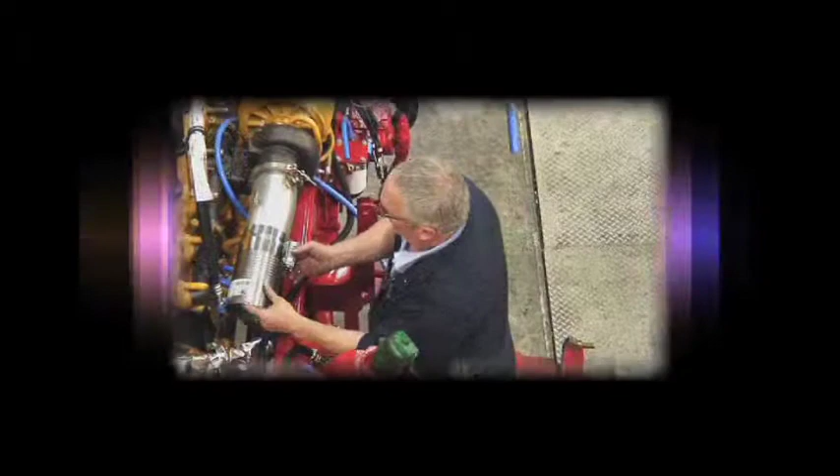We humans make things in a very different way. We carve out raw materials, pour things into molds, or we make a bunch of parts that we put together to make even bigger objects. Think about it: nature grows things like trees, then we break these trees apart to make our own stuff. Nature adds to create, and we subtract.

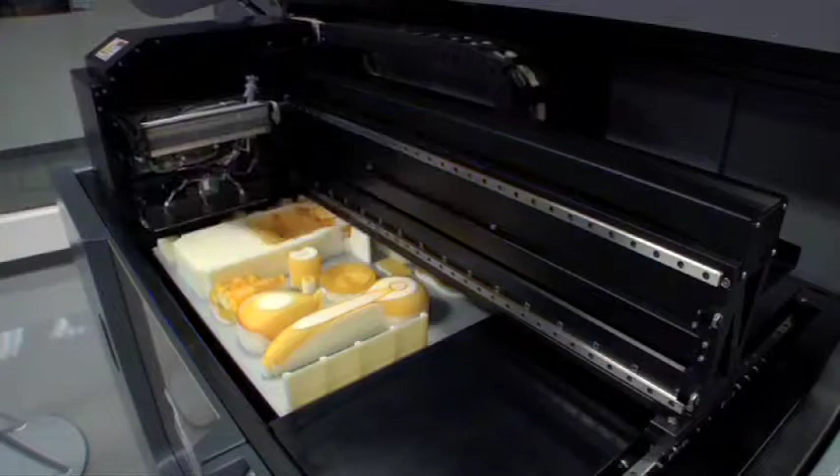What if we could grow things too? What if we could kind of print out our designs into real solid objects? Now that would be cool.

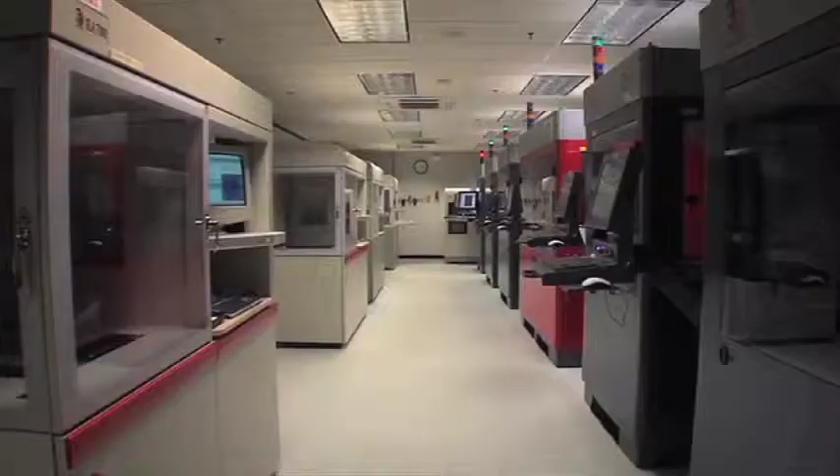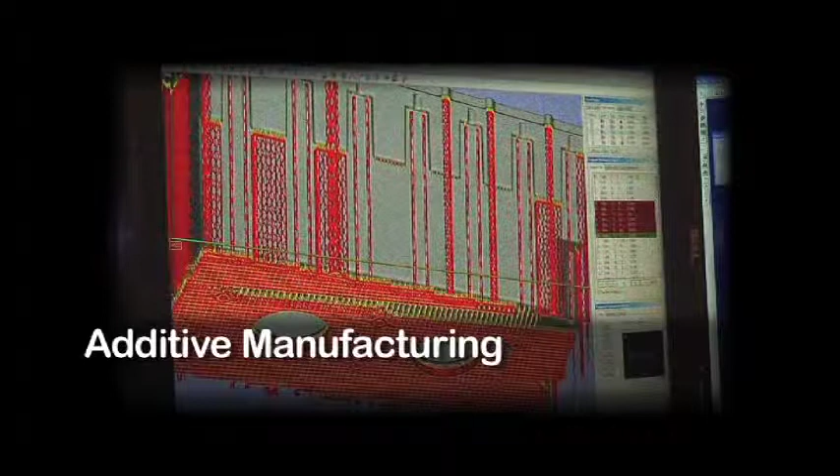Additive manufacturing, put quite simply, is precisely what it says: you're manufacturing something by adding. Actually, in the purest sense of the word, we are growing parts because we're adding layer by layer by layer to create virtually any geometry that you can imagine. The additive manufacturing process is focused on three main areas: 3D computer modeling, 3D printing, and the actual 3D additive manufacturing of products.

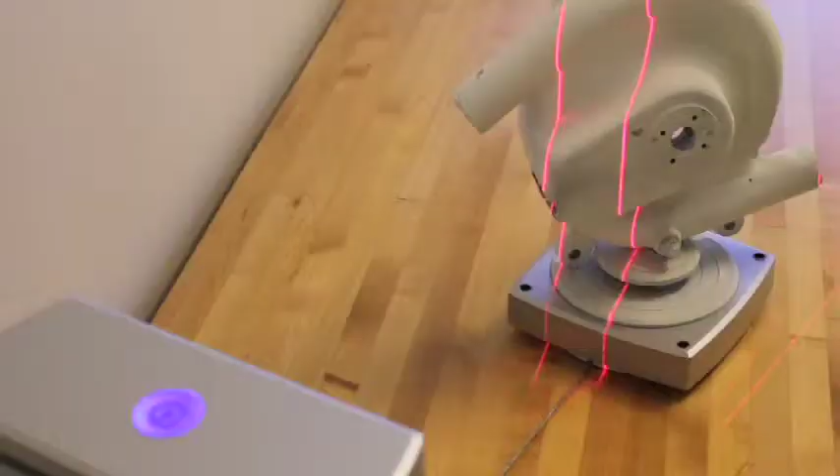One of the coolest ways to create a 3D computer model is with a scanner. These devices scan real objects to make digital copies. From there, you can use the data in lots of ways.

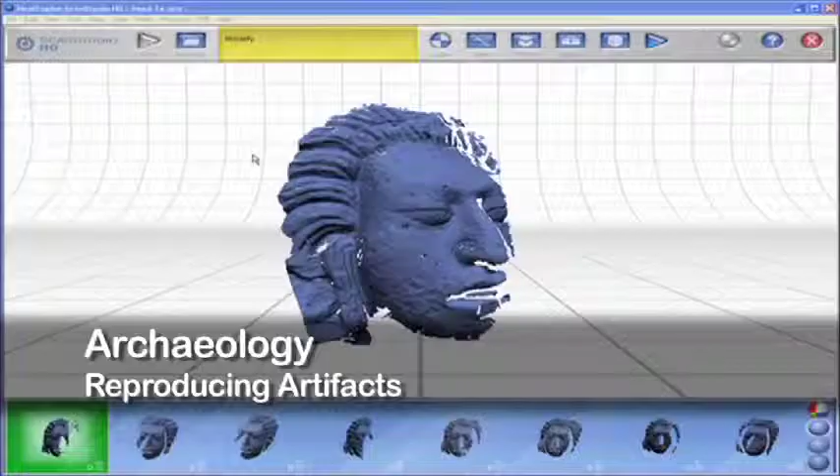Once you have the computer model, you can create a physical model using additive manufacturing.

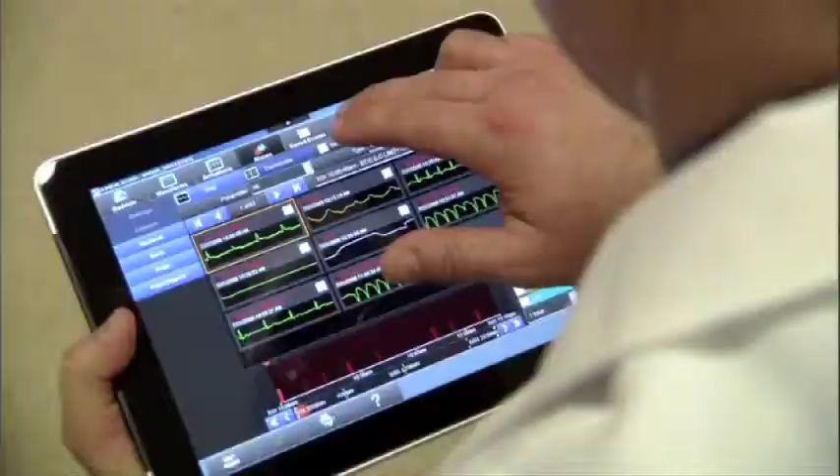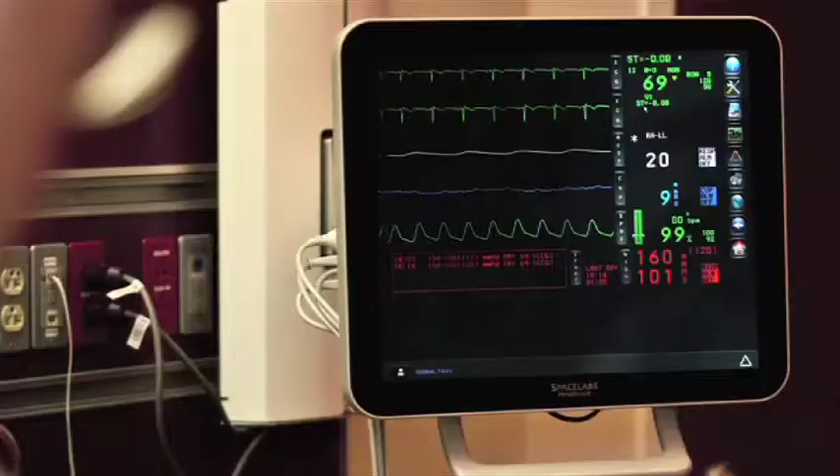Spacelabs uses additive manufacturing to design high-tech medical devices and patient monitoring systems for the healthcare industry. So this is what's been on the shelf for actually quite a while at Spacelabs. We were kind of tasked to make a next generation of that.

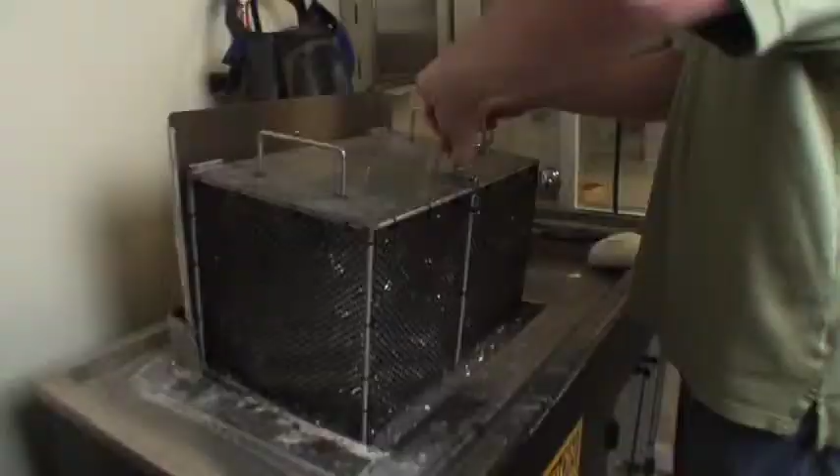Getting a prototype is very expensive and took a long time to get. Now we can print it out overnight and actually feel a real part in our hand. It shrinks our design process.

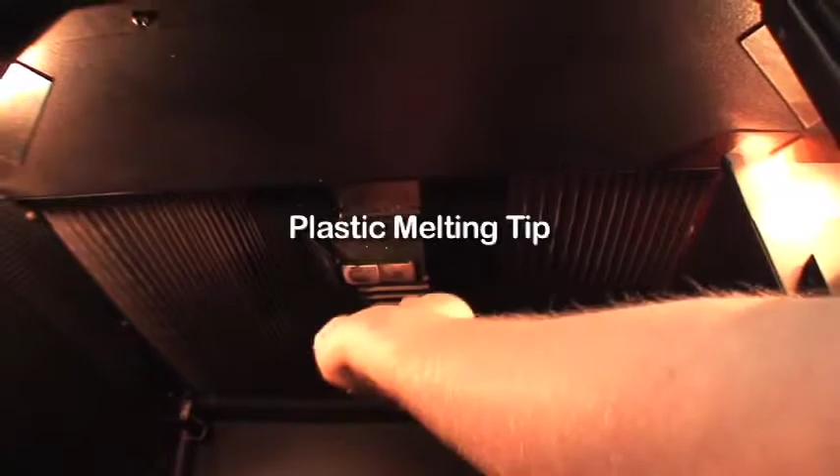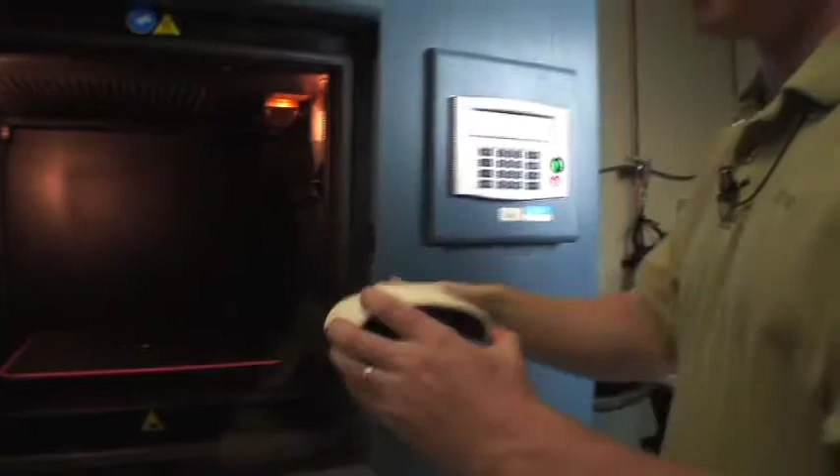It's a lot like a sophisticated hot melt glue gun, this machine. It comes out through and it comes into this tip here. You can build a layer and the table will go down and build on top of that layer, and go down and build and build and build. It just keeps depositing more and more material and builds layer by layer. You're using actual plastic material, so in the end you end up with a real part.

3D Systems is an international leader in 3D printing technology for additive manufacturing. We can create geometries that can not be built in any other way, shape, or form.

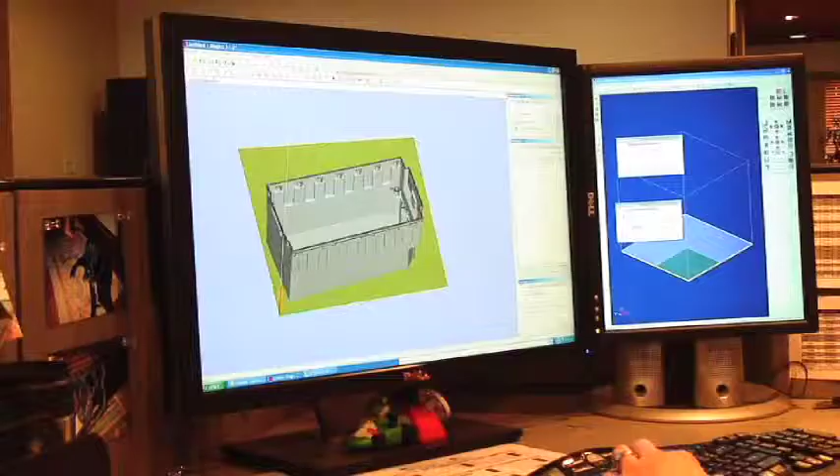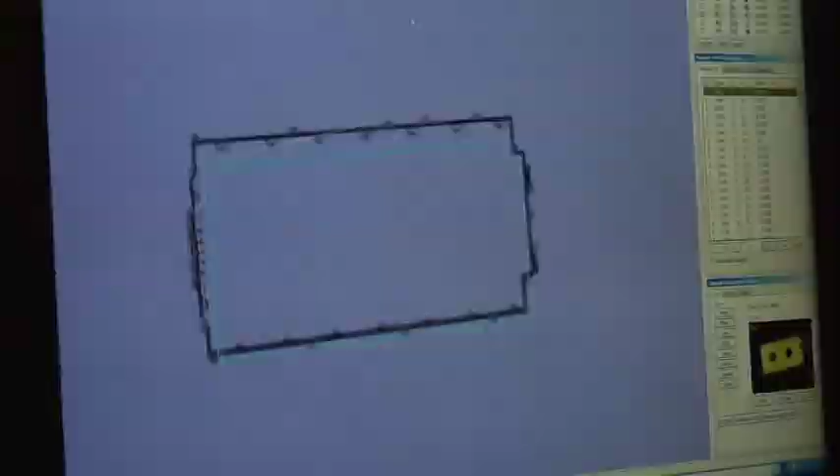So all of this starts with CAD, computer-aided design, and a digital model. You'll see it on your computer, you will design it on your computer. That computer-aided design model is then sliced like you would a loaf of bread, sliced into piece after piece after piece until you have the entire model in these slices. In additive manufacturing, each one of those slices is very, very thin, about the thickness of a human hair. The equipment, instead of trying to draw this entire piece, only starts by drawing the very bottom of the loaf of bread.

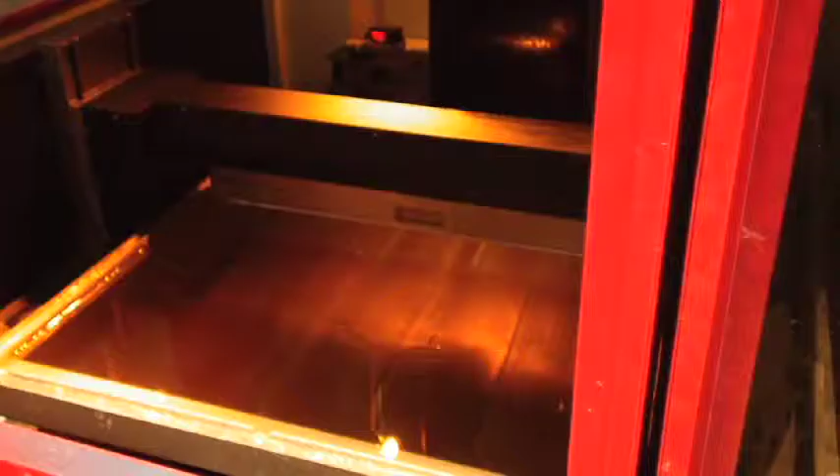It draws that very first layer very thin. Then the equipment drops down and another layer is drawn, and another and another and another until it grows this entire part.

Stereolithography is when you break it down, just what it sounds like. Lithography is a printing process, a two-dimensional printing process. Well, this is done in stereo, so it's printing three-dimensionally.

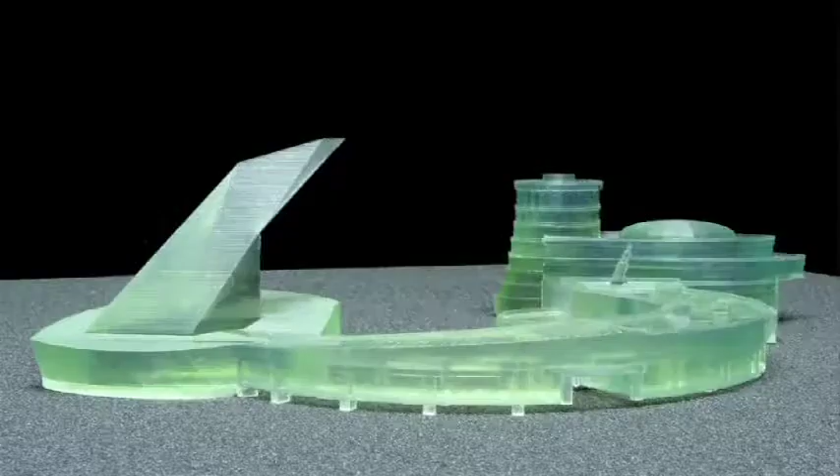There are a number of artists who are doing things for the gaming world. If you want to make physical objects in the world, whether it's buildings or hearing aids or jewelry, additive manufacturing will play a role.

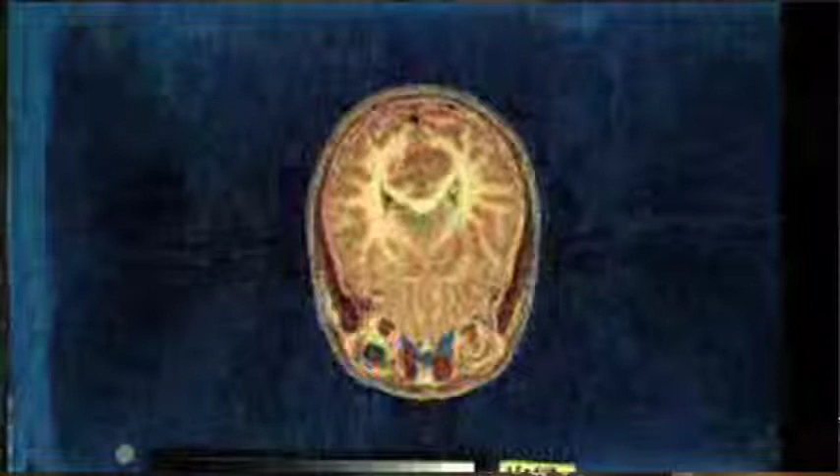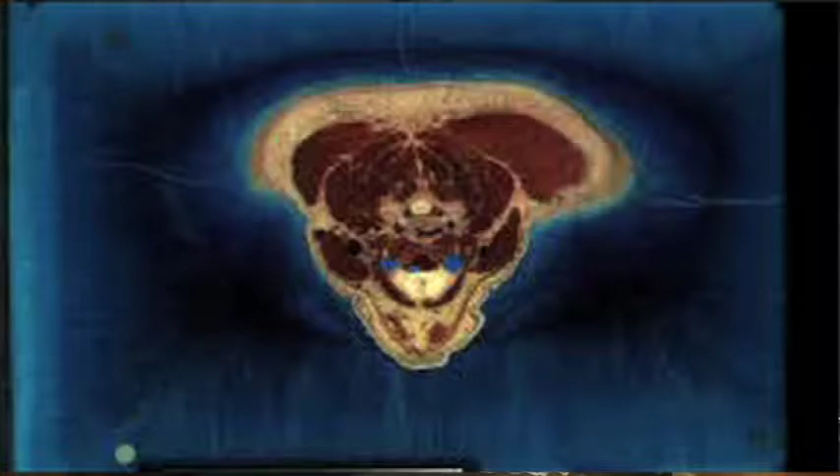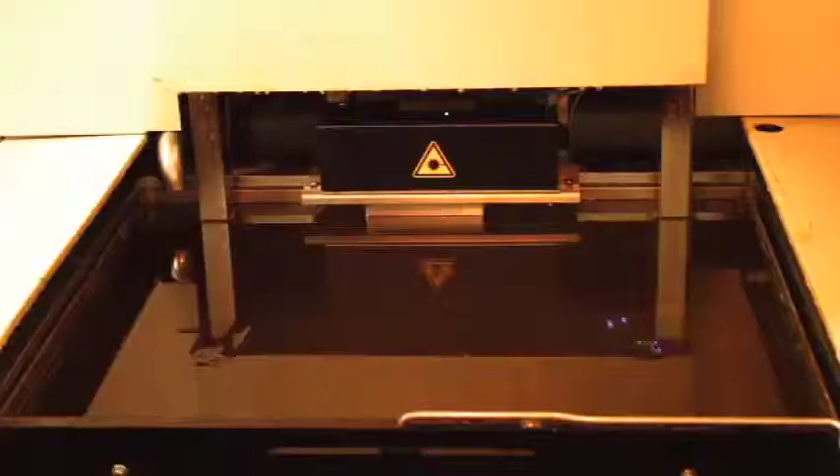What this does is it allows the doctor to practice on running a stent or a catheter into the heart from different locations.

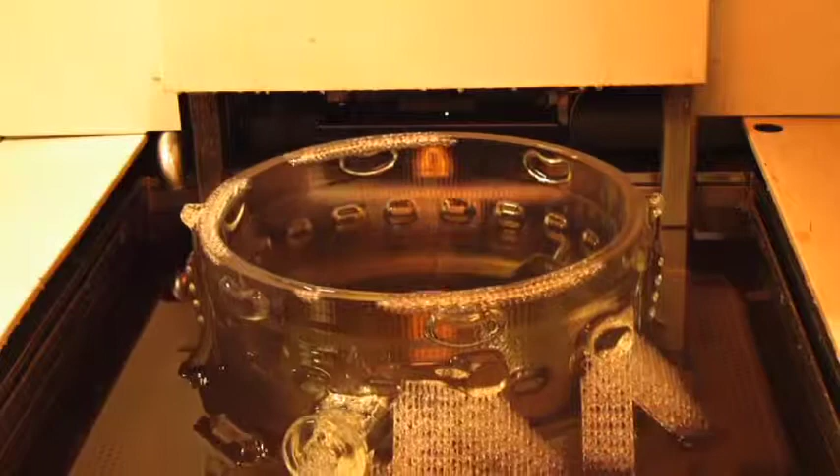If you're at all interested in manufacturing or making things, of designing things, as you go through your formal education process to reach that goal of making things, you'll be made aware of additive manufacturing, and you'll need to challenge yourself as to what else it can do. It is an inbred part of manufacturing today.

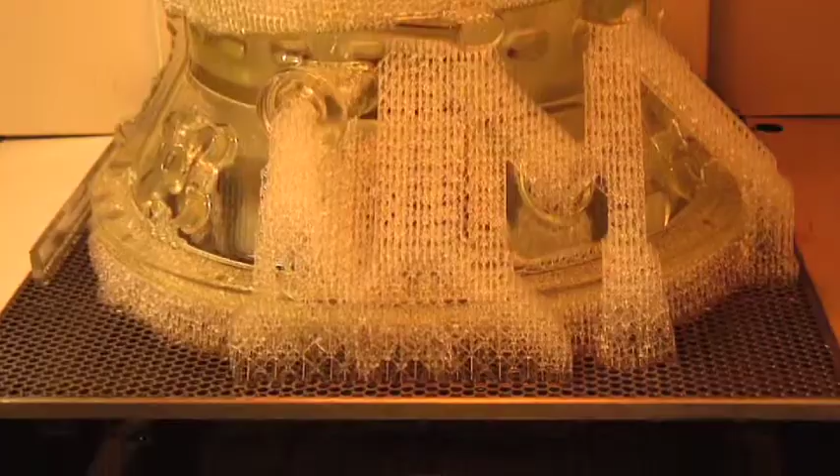So, if you're interested in building or making, prepare yourself accordingly.

Going direct to production from the 3D computer model is the new frontier for additive manufacturing, and big challenges lie ahead. That's because we must make next-generation 3D printing machines that can use the new materials to make finished products.

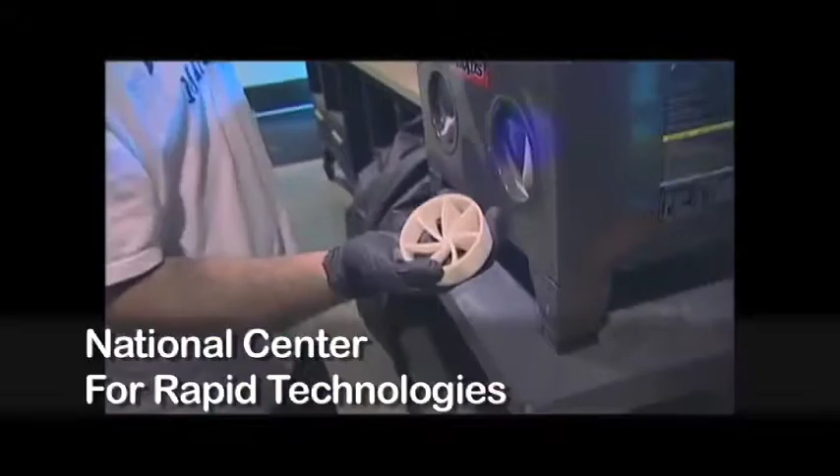The National Center for Materials Technology Education is focused on materials science, and think about it, there are all kinds of materials out there that today's products are made from. Metals, ceramics, polymer plastics, composites, and more. In the future of additive manufacturing, it's all about the materials that these new machines will use.

Industry expert Terry Wohlers has some predictions for the future of additive manufacturing. In the future, we're going to see much broader access to the technology. We'll see low-cost machines that are affordable by almost anyone.

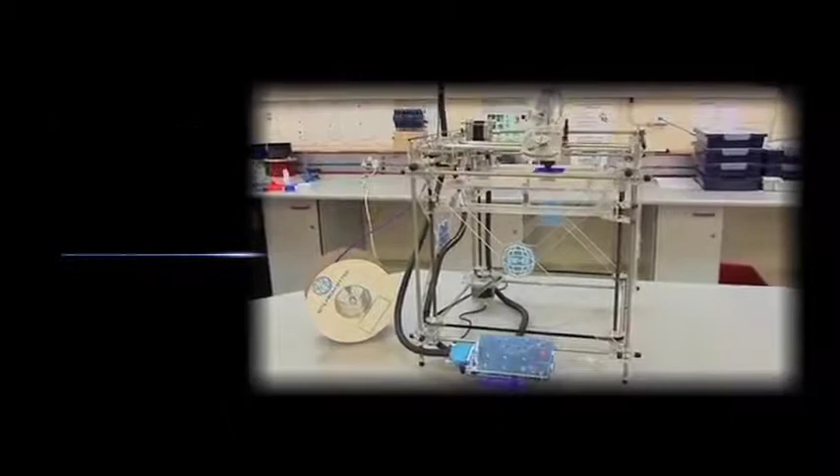New business models are developing to the point where almost anyone located almost anywhere can now be in the product development and manufacturing business. Really, to be a manufacturer, you could operate out of your home, your garage, your dorm room, pretty much anywhere.

Few products we buy today have not benefited from the technology, whether it's an automobile or a plane, consumer electronics, power tools, the list goes on and on. There are few industries that will not be impacted, and some in a dramatic way, by this technology.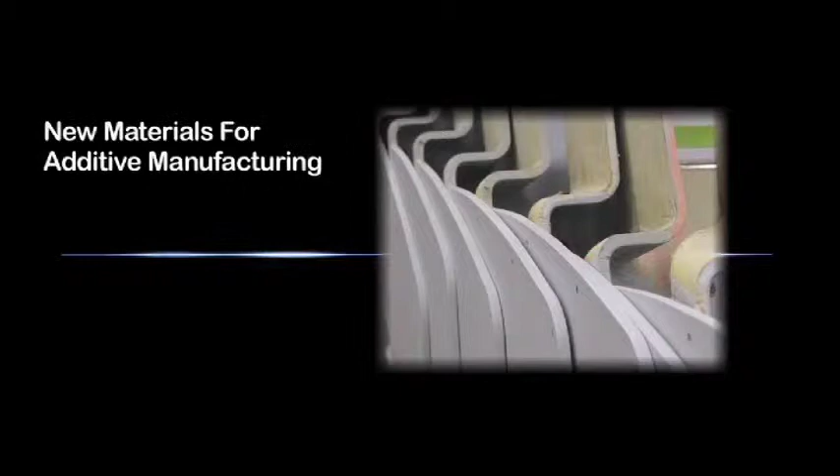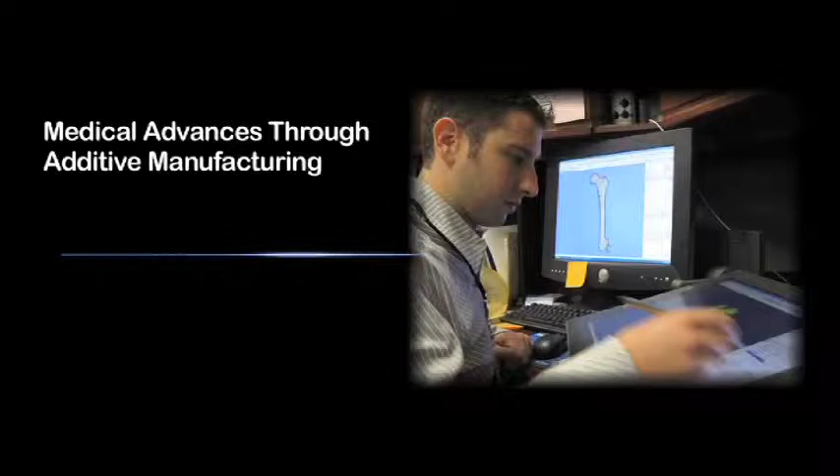Really, the next frontier is the development of composites and graded materials. Composites would be materials where you're blending in, say, glass fibers or carbon fibers in with other plastics. And we're already beginning to see companies and universities around the world, a lot of energy being put into developing

human body parts with this technology, using 3D printers to print scaffold structures that are the shape of the tissue, whether it's hard tissue such as bone or soft tissue, and then jetting live cells, living cells into the structure.

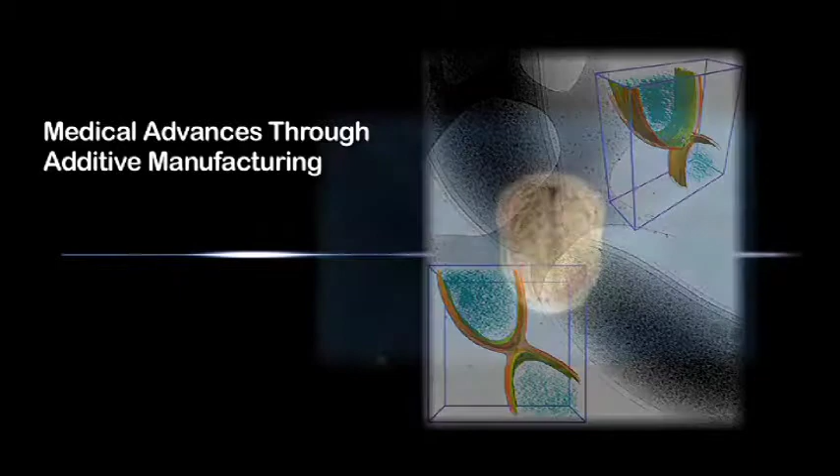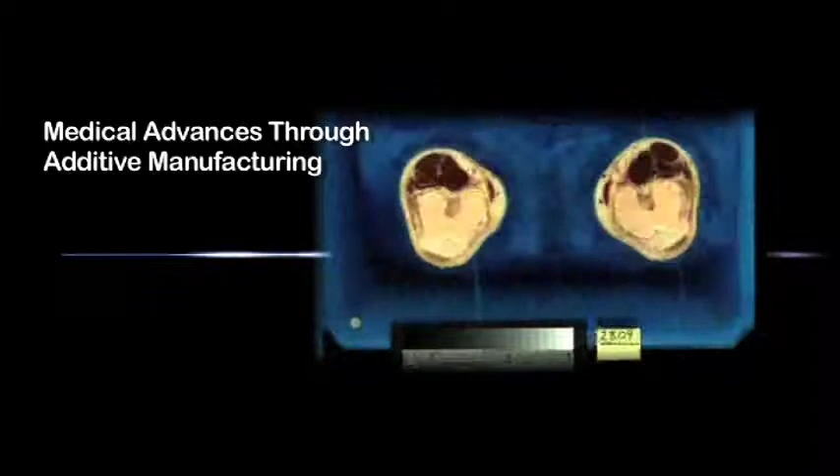They've shown that they can grow skin, parts of bladder. Their goals really are to create kidneys, eventually hearts. There's just so many directions in so many industries and so many applications within these industries, so many possibilities.

In the end, everything that is made, whether by humans or by nature, will happen step by step over time. Nature will make leaves, cell by cell, plant by plant, every spring.

People will build things, like airplanes. They will be put together, piece by piece, until finally they will roll out of the factory and fly away.

It's hard to know what's in store for the future of additive manufacturing. Someday, will we be able to just print out our stuff at stores in a shopping mall? Will we find ways to pull atoms together out of thin air to make our products of the future? Who knows? But what we do know is this: additive manufacturing is here to stay.

It's the new frontier for manufacturing and for material science.